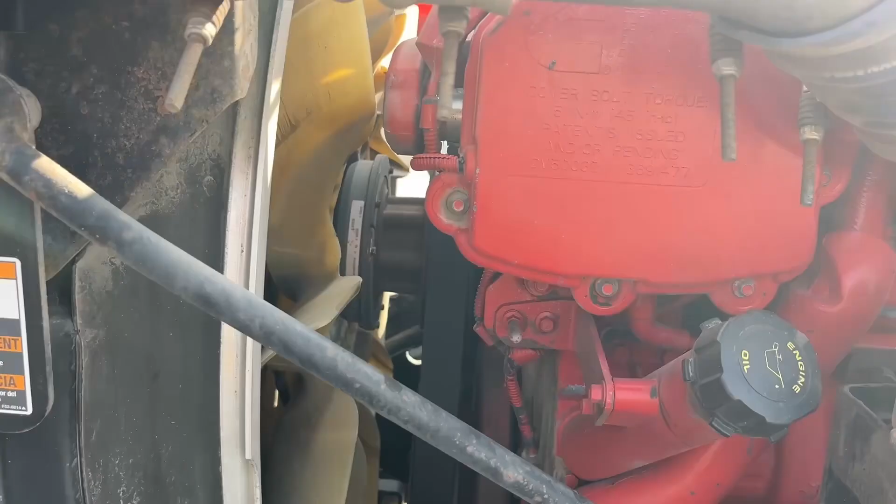So guys, if you're experiencing trouble finding your solenoid, this is my suggestion. This is the fan, this is the clutch, this is the belt. You see this line? This is the air line. Just follow that air line.

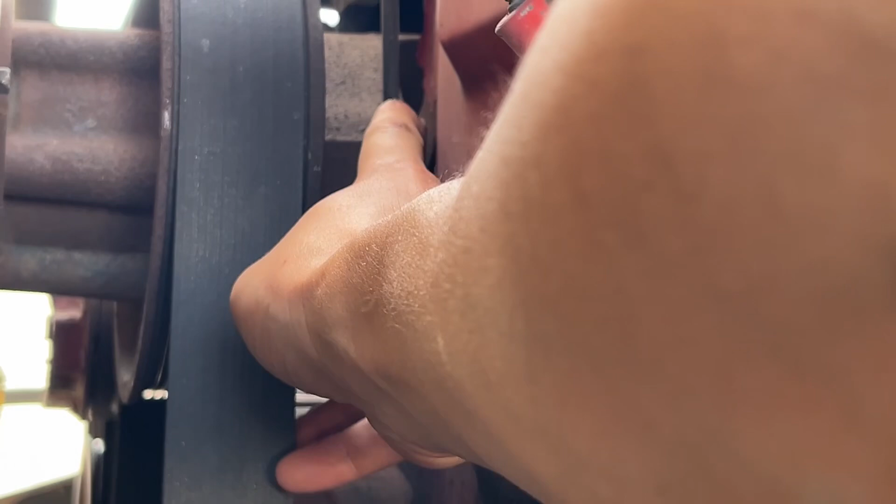I'm following it right here. It goes on the top of the engine, and it goes all the way here. And this is your solenoid right here. See the black channel? This is your air line, right?

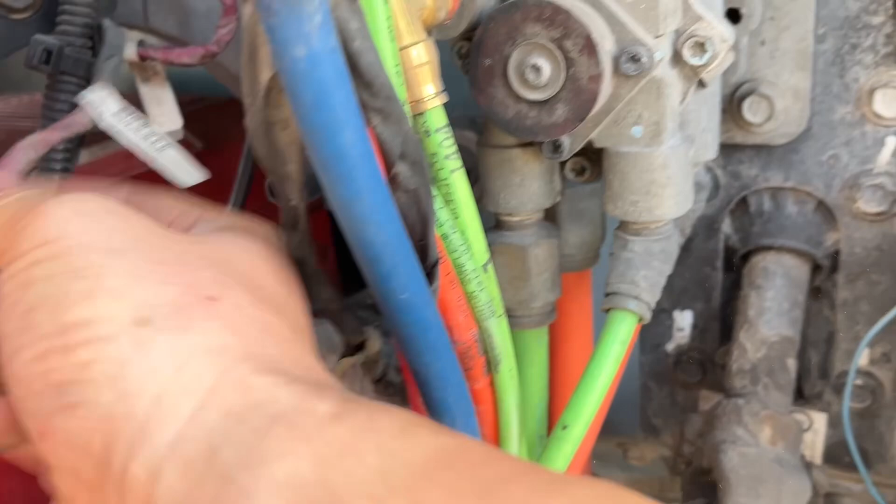So on this side, you have a power plug. Just unplug it, it's easy. So over here you have this, the green hose, which is your supply air. It should be under pressure all the time.

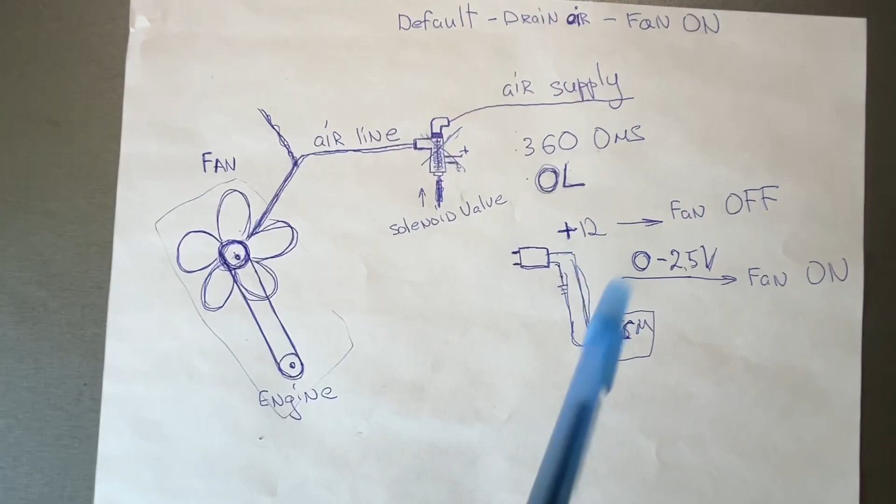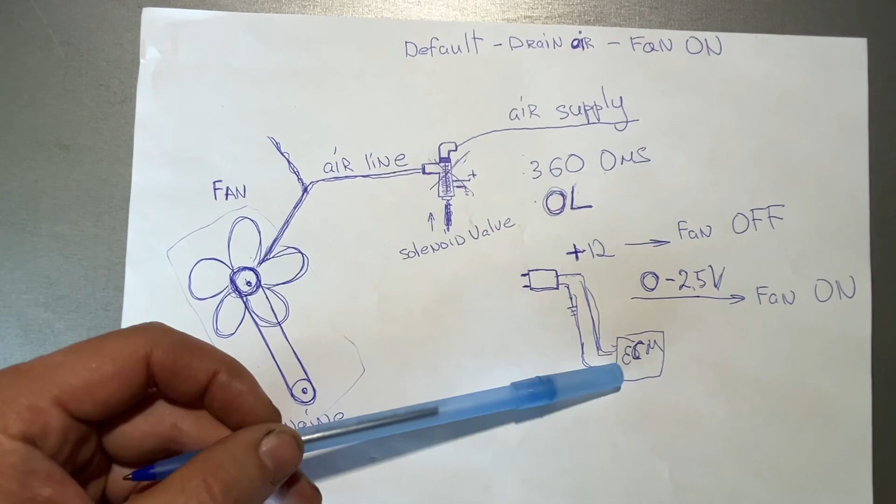I'm trying to think how to explain how the whole cooling system works together with the solenoid valve, this piece, which plays a huge role in supplying the air or letting the air go through. There is an ECM, there is a plug harness, there is an air supply, there's an air line, there's your fan, and fan connects to the engine.

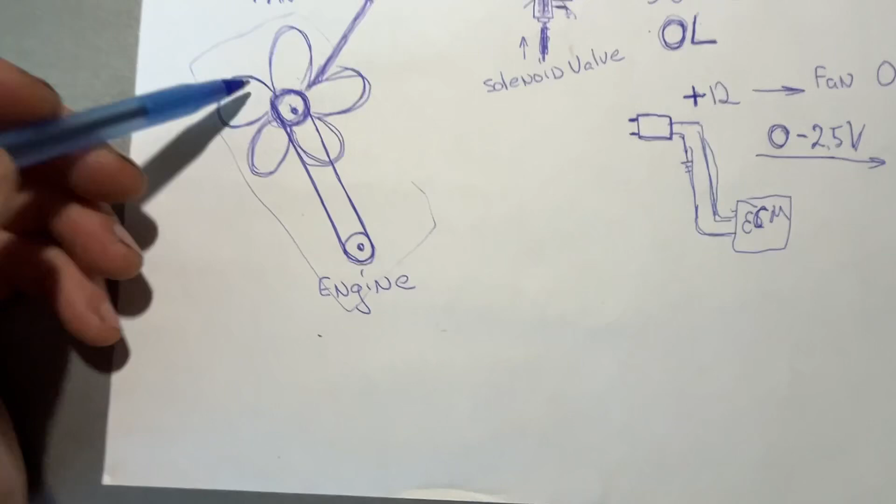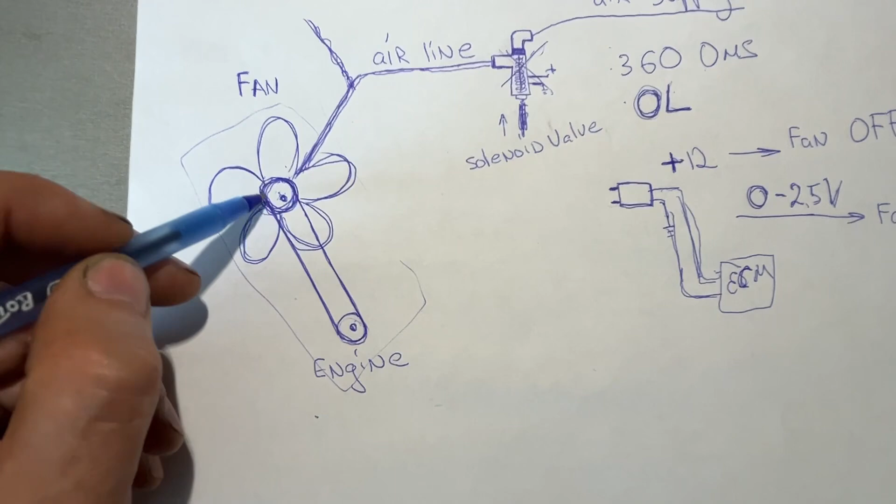So let's talk about the basics. The fan itself is powered by the engine force. So you might notice the belt which connects the engine part with the fan. It constantly spins as your engine is on. You will see the belt running, right?

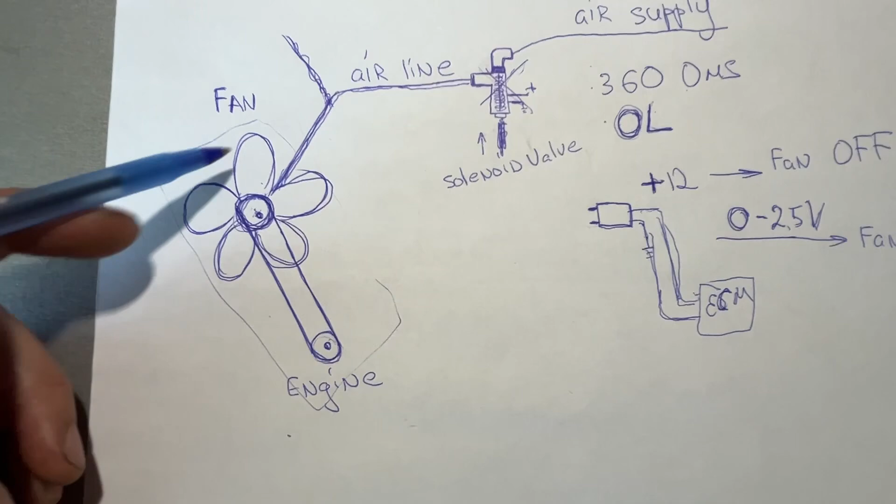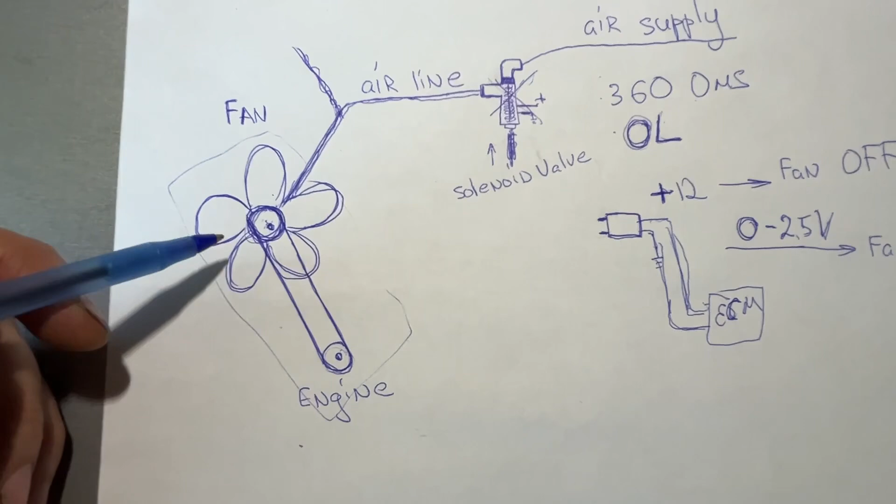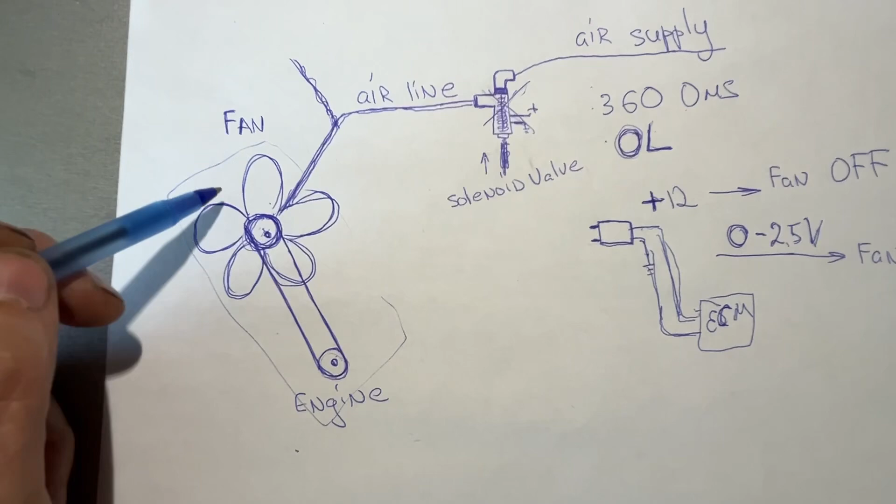But your fan doesn't spin all the time. It spins only in certain conditions. There is a clutch which controls when to spin. When your clutch is engaged, it connects to the engine through the belt, and your fan will start spinning right away. When the clutch disengages, the belt will keep spinning and running, but your fan will stop. This is the very basic of how it works.

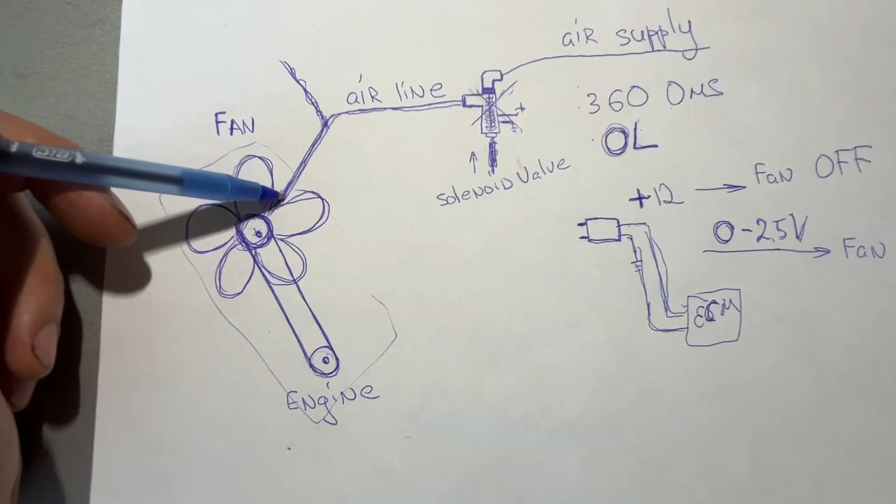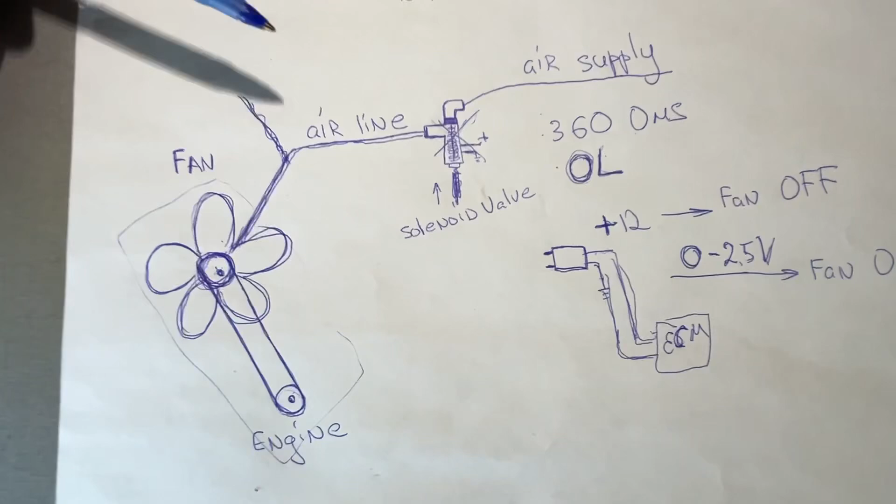The clutch itself is controlled by airflow. When you have air inside the hose, inside the line, it will disconnect. And opposite, when there is no air inside, it will engage, the clutch will engage and the fan will start spinning. So who controls the air to be inside this hose?

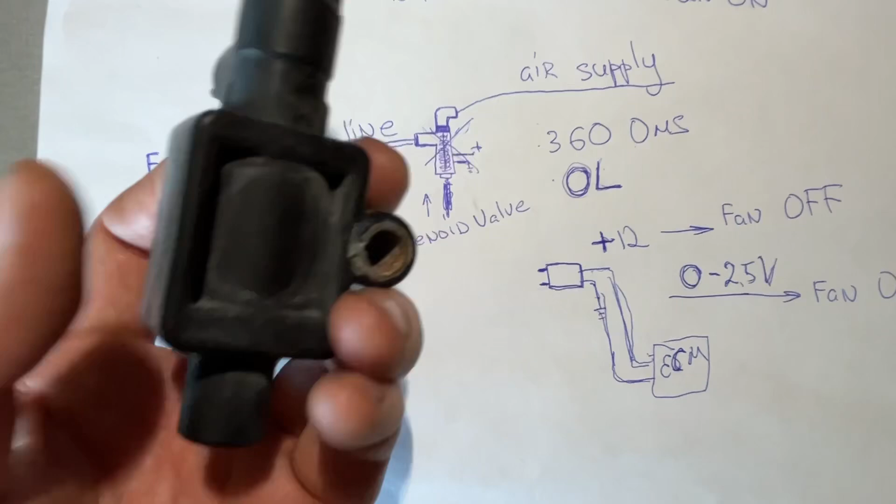There is a valve. The valve basically works like an automotive relay, you know how that works. There is a coil inside. When you connect to the power, when you switch it on, the parts inside let the air go through, right? The green is supply, and the black side is the exhaust. So it just works like a normal relay.

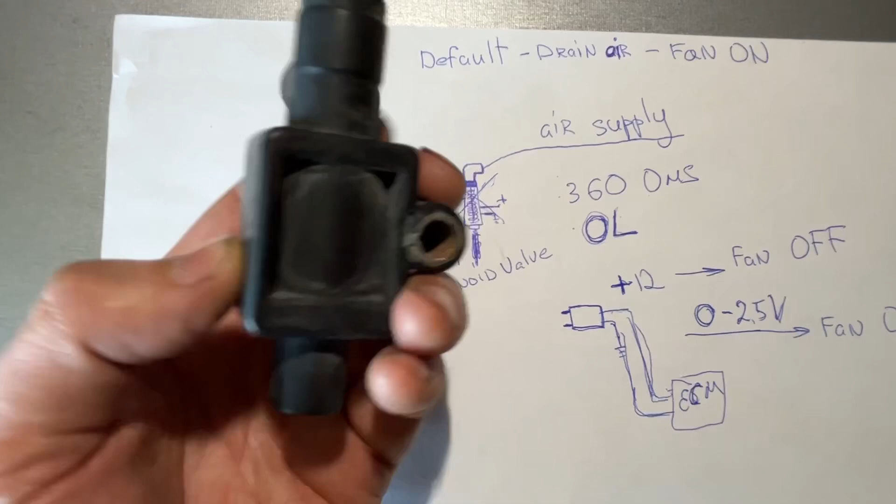And on the bottom there is a drain to drain the air. So this is the air valve actually, the solenoid, it's called solenoid. This is the part number, guys, and it says normally closed, 12 volts.

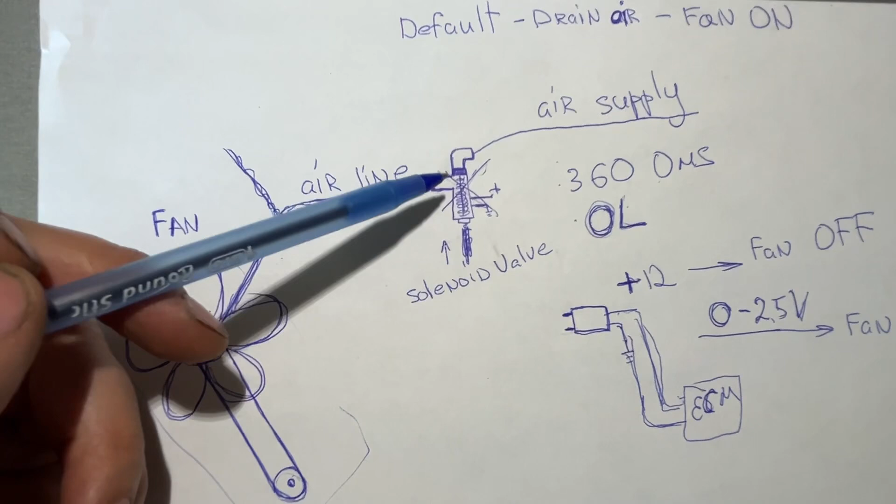So next, who controls the solenoid? Who is telling the solenoid when to close and when to open, when to work or when not to work? There is a plug, you will see the plug right here. So the plug is connected to ECM. ECM is your engine control module.

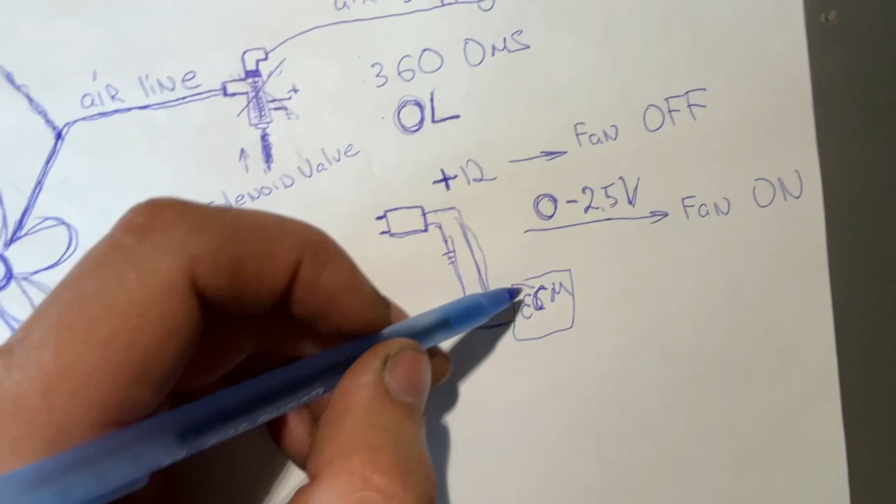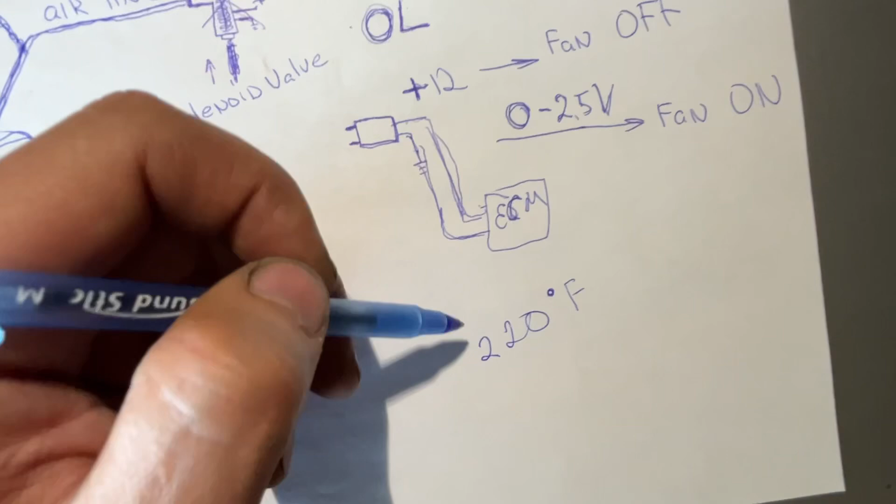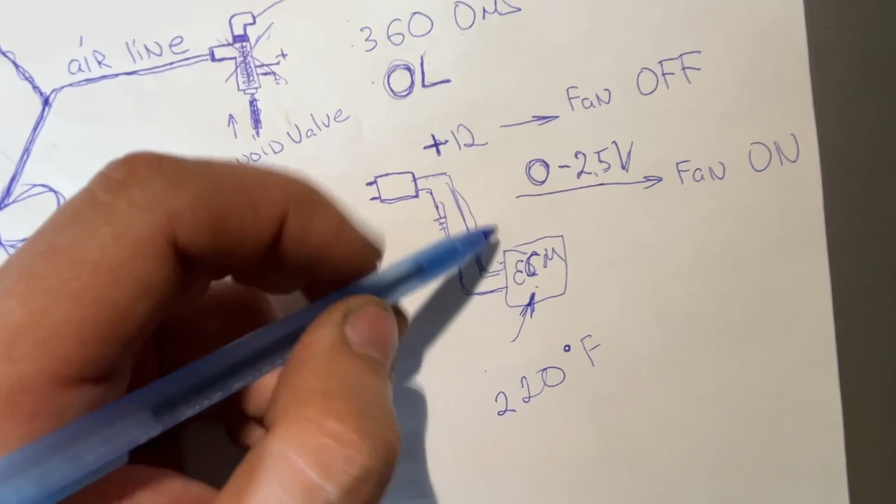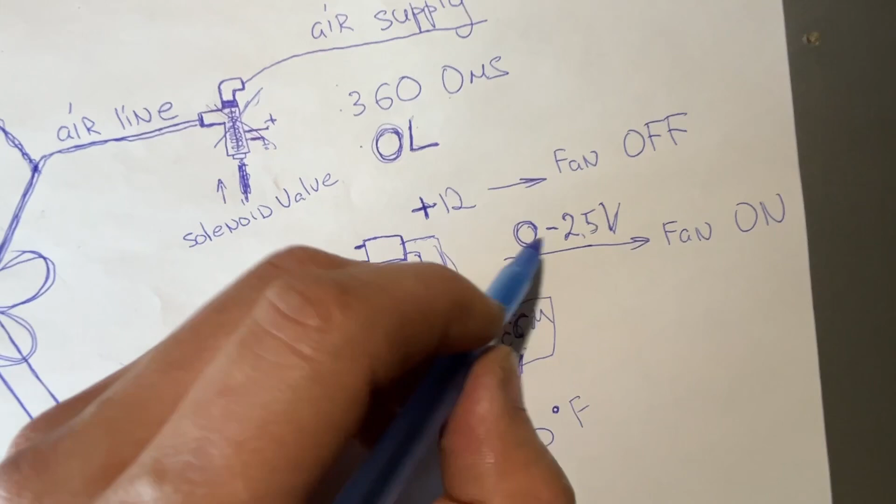So whenever the temperature of your engine hits a certain point, let's say 220 degrees, right? Your temperature sensor will send a signal to the ECM saying it's very hot here, we need to do something. So what the ECM does, it will disconnect the power. It will drop it from 12 volts to 0, or as I tested it, it drops to 2.5 volts, which is not enough for the solenoid to work properly.

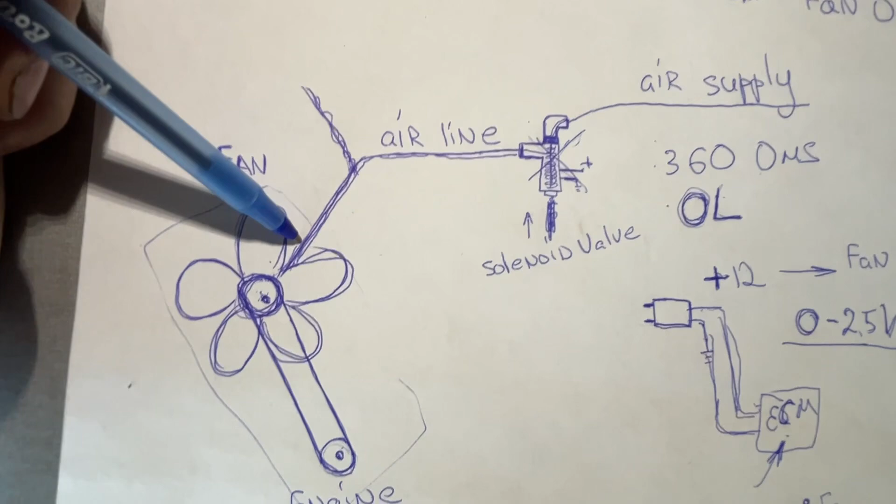And when the voltage drops, what happens? It disconnects the air here, and since there is no air in this line anymore, it will engage the clutch and your fan will start spinning.

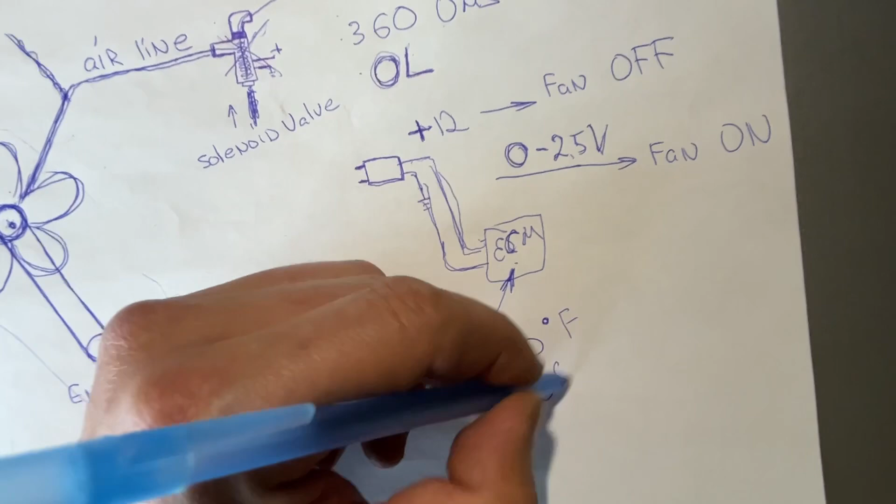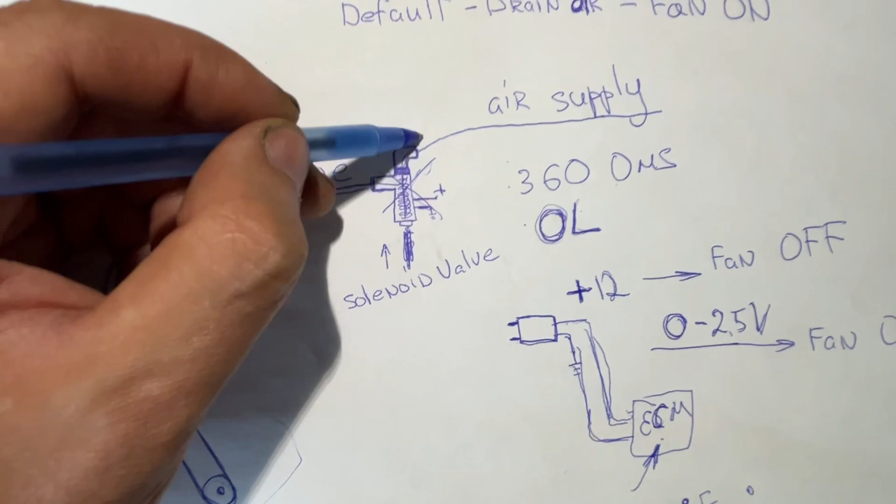And opposite, when the temperature sensor says, okay, we are at 200 degrees right now, we are good, it will connect. The ECM will send a constant 12 volts to the plug. It will turn on, it will switch on the solenoid, and the solenoid will start supplying this air line with air, and the air pressure build-up will force the clutch to disengage, and your fan will stop spinning.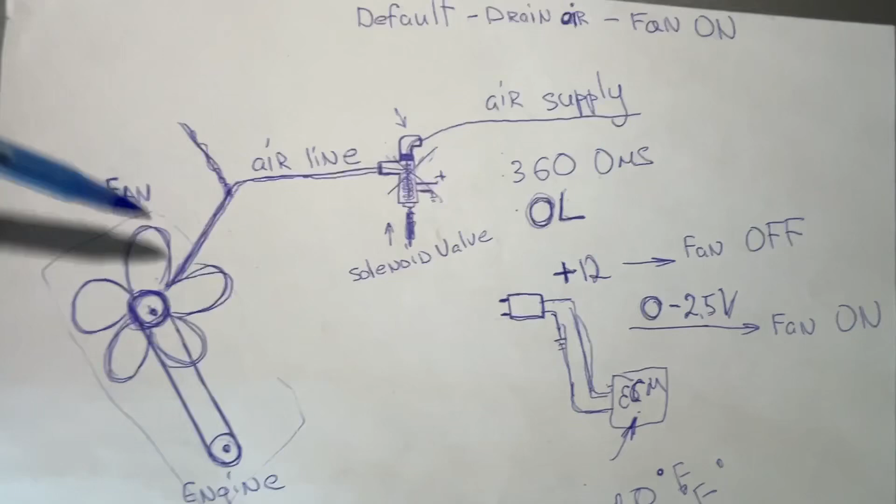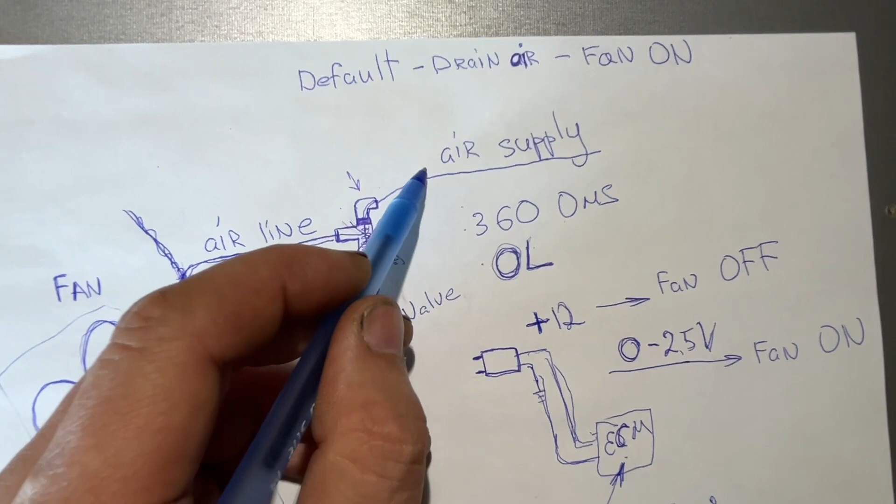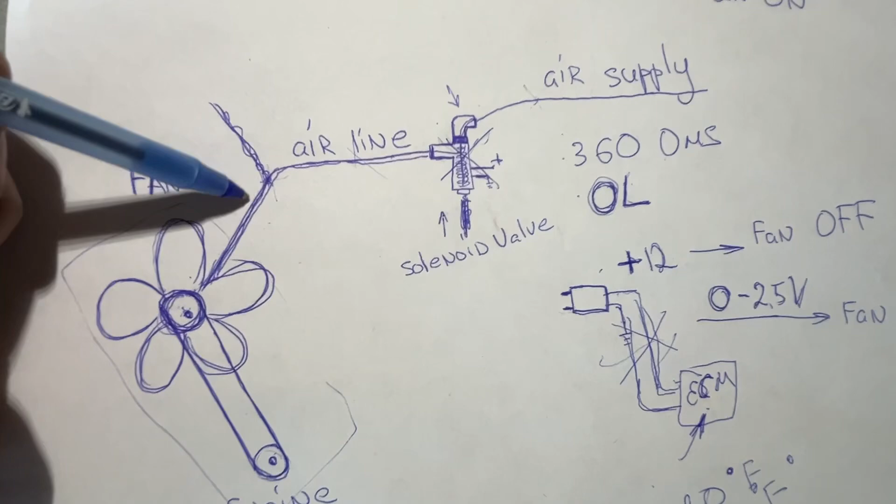This is very basic, guys. So by default, if something happens with your airline, if something is wrong with your solenoid, if something is wrong with your airlines here, if you have a leak here, if you don't have any power, if your harness is broken, if something is wrong with it, all these reasons will lead the fan to start working, because if there is no air supply, if there is no air inside this line anymore, it will start spinning. This is made for a purpose, so if any issues occur while you drive, your fan will stay cool. It will prevent your engine from overheating.

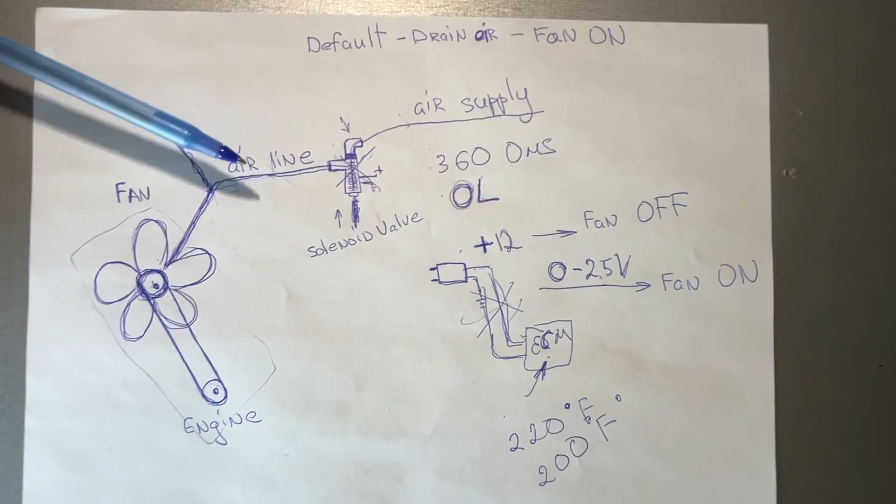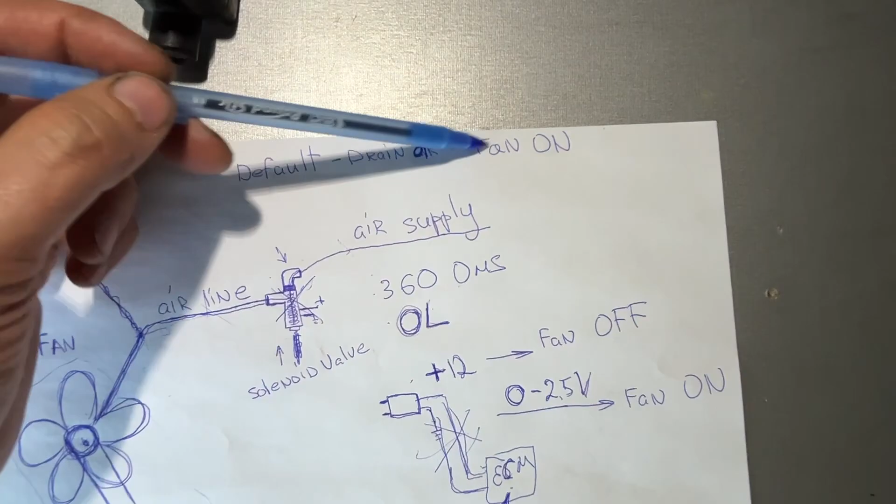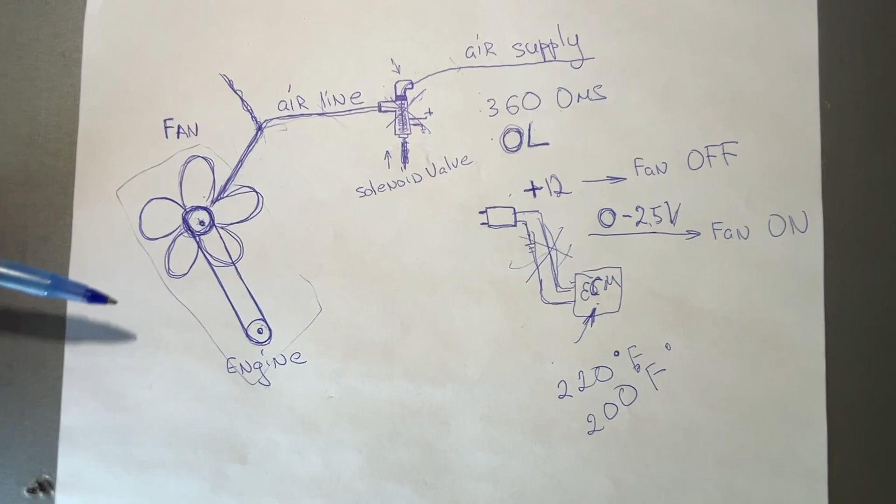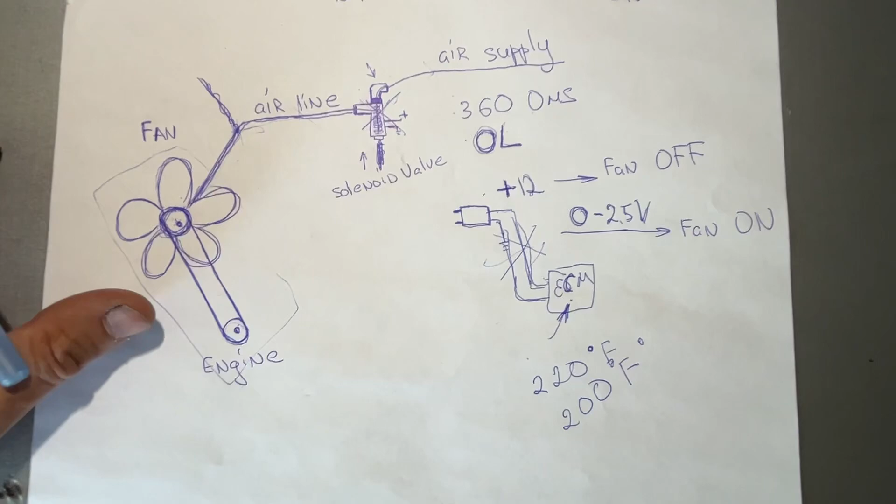By default, it drains all the air built up inside here, and the fan will spin all the time. If you drive 7 or 8 hours, doesn't matter, it will keep spinning. It's not too bad for the fan, it's just made this way, but you will have less performance, less miles per gallon to drive, because it uses a lot of energy to keep spinning due to the resistance here.

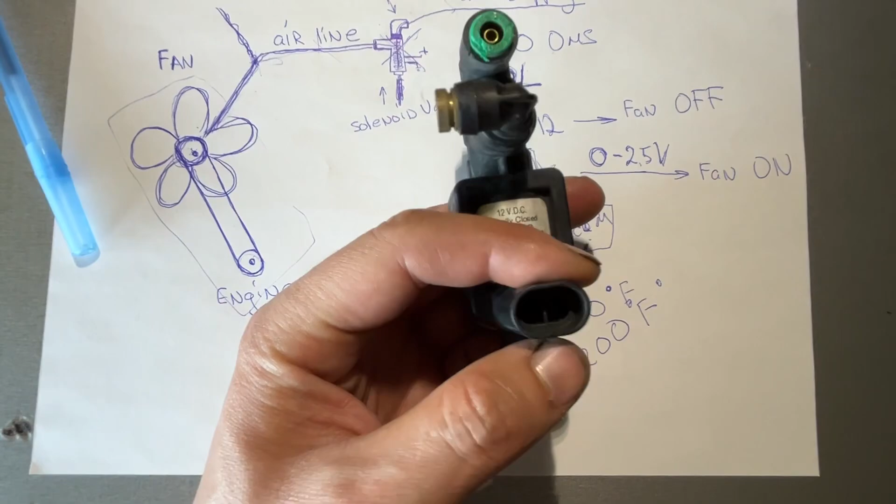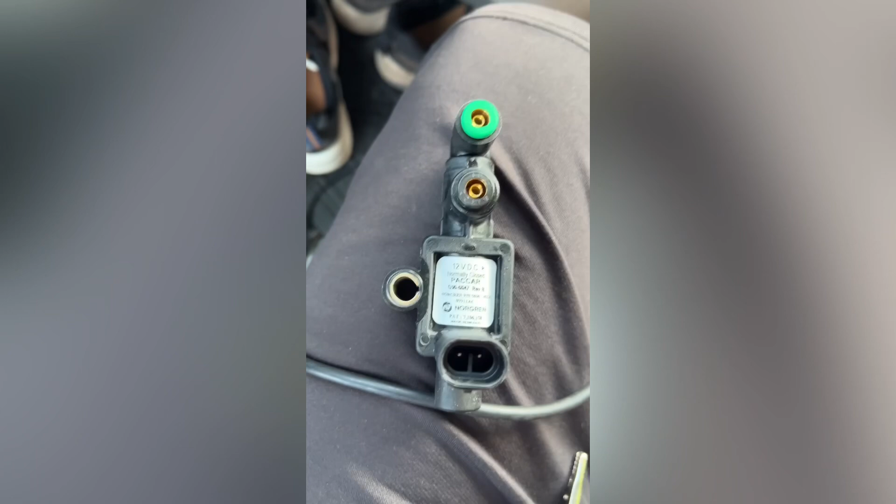So one way, guys, to check if your solenoid is in good shape: you see this terminal for the ground and power. Don't worry, it is plus 12 volts, not 5 volts, so you can check it with your car or truck battery. First you need to connect the ground to one side, then send the plus 12 volts.

Whenever you send it, you heard the click, right? When you send the 12 volts here, it vibrates and inside you hear the click, that means the coil is working and your solenoid is in good condition.

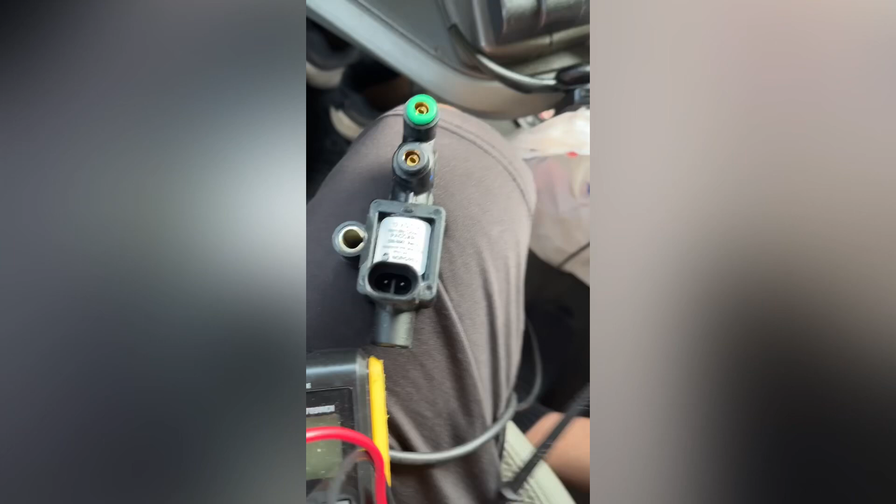Another way to check, if you don't have this power probe to send 12 volts directly, is to use a multimeter. First you need to set it to resistance, just like that. If not familiar, let's say it's 2K - you look for this sign of the resistance, this is 2K ohms.

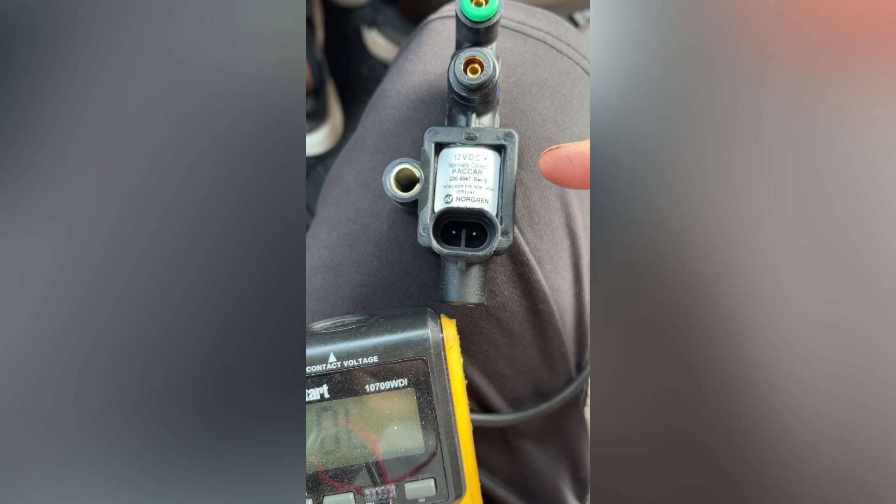We try it so if the coil inside is not broken, the electricity will go through, and since the electricity goes through, it will show some kind of resistance. But if the coil is broken, if the contacts inside are broken, when it sends electricity through, the resistance will be absolute, like no connection at all.

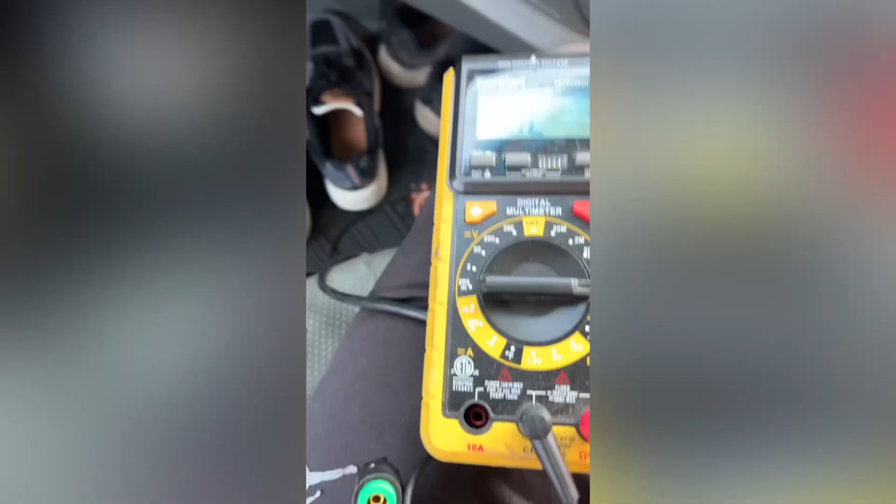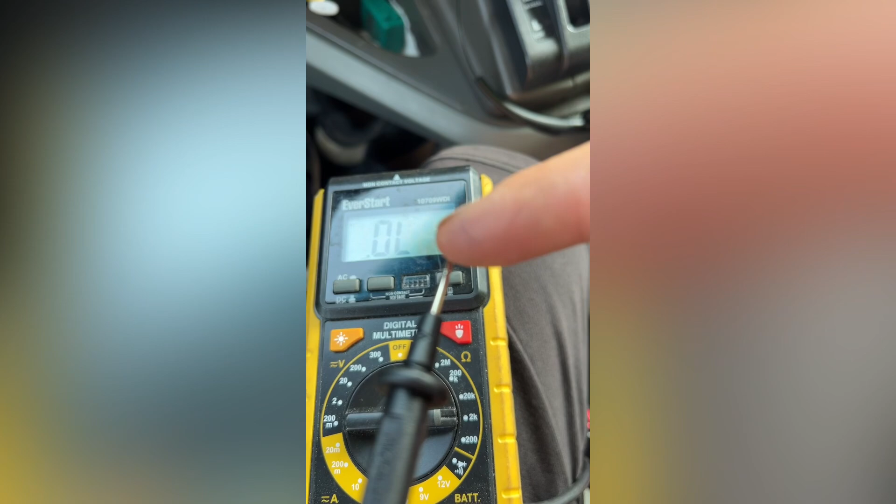So this is what we do, just look at this. Right now it says overload, right? I hope you understand how the resistance works. Right now between this and that, no resistance at all, see, that electricity goes through. But let's say there is isolation, absolute isolation - you will see overload, like electricity from this side can't go through to this side, and the multimeter thinks it is a huge resistance. It's overloaded.

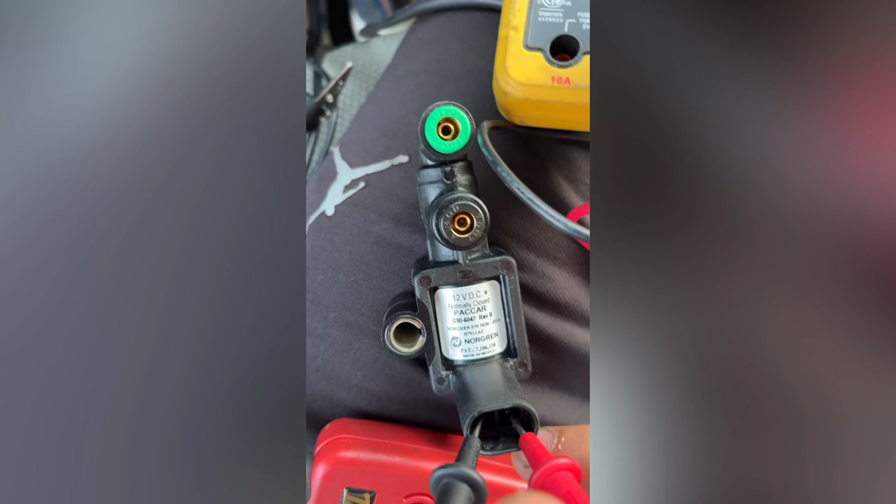So this is how you check. I'm trying to check - every time I tap, you will see it over here. Right now it shows overload, it's a little hard to hold the phone and show you guys. I don't know if you see the changes - so it's 36, something changing over there. Whenever I touch the contacts, it shows 36. 036 means 360 ohms.

So this is a normal condition, okay, this is how you check. First you can check the resistance, and if it shows 360 ohms, then your solenoid is in good condition.

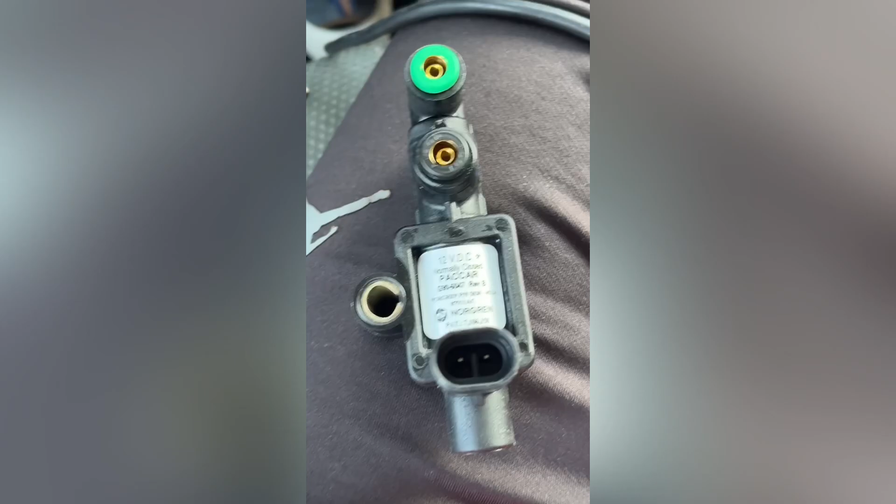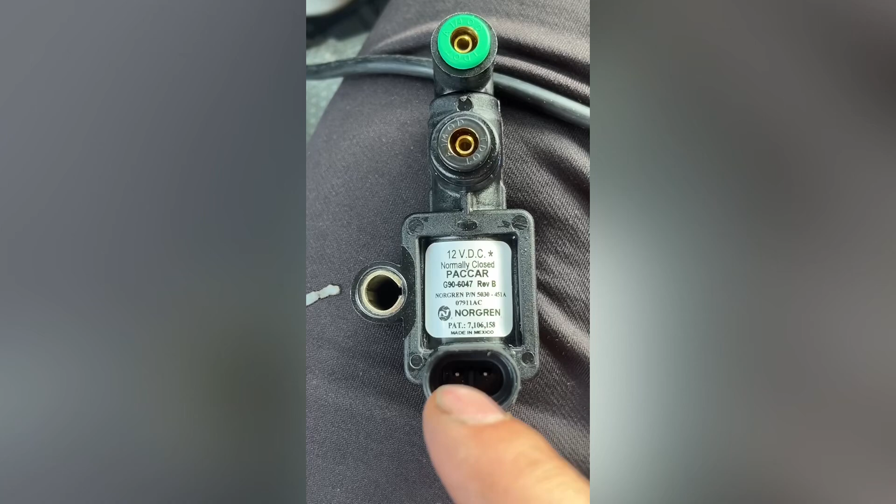Another, a little rougher way - since all of us have a car battery, but not all of us have a multimeter, you can send the 12 volts. It's safe, 12 volts directly here, ground to the left side. That's how I did it, I don't know, it might work either way, it may work opposite, but I'm just showing you how I did it. I sent ground to the left side and plus to the right side, and I heard the click, a certain click inside, and this is a sign that your solenoid is in good condition.

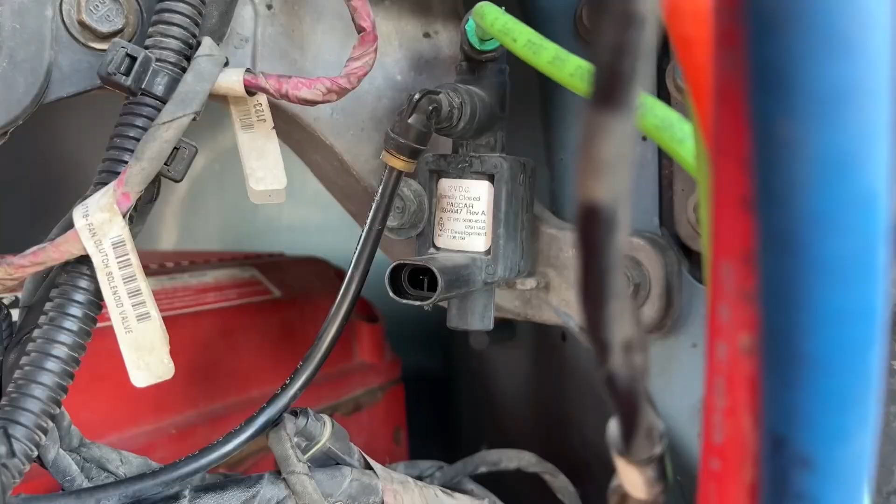Some of you guys will say, oh, it's hard to remove it. This is what you use, guys. You press it on both sides, just like this, and at the same time you pull the hose. Same thing here, you press it down here with your wrist and pull it. That's very easy, guys, very easy.

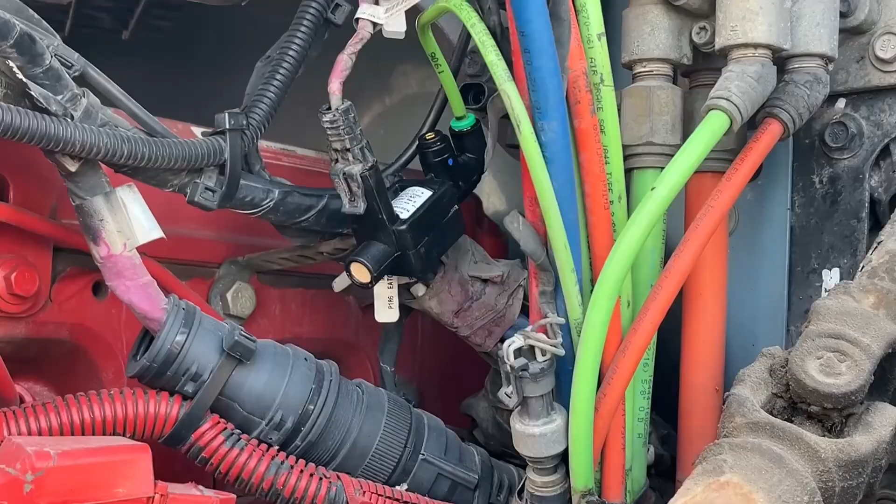Guys, once I turn the ignition on, I'm just showing you - this relay, this solenoid starts working, and it lets the air go from here to here. See? This is how it works, guys. Anytime I turn the ignition on, it will force the solenoid to let air go through. See? It happens all the time, this is how it's supposed to work.